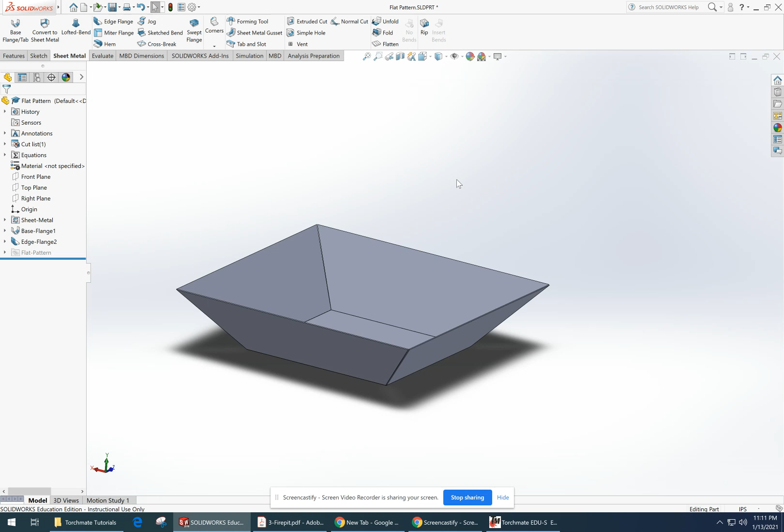So what we're going to do to start is build the firebox, and then we'll build the base after. If we take a look, I'll open my SolidWorks file here. This is essentially what we're building. This one doesn't have the drainage hole yet, but I built this one in SolidWorks with a sheet metal tool.

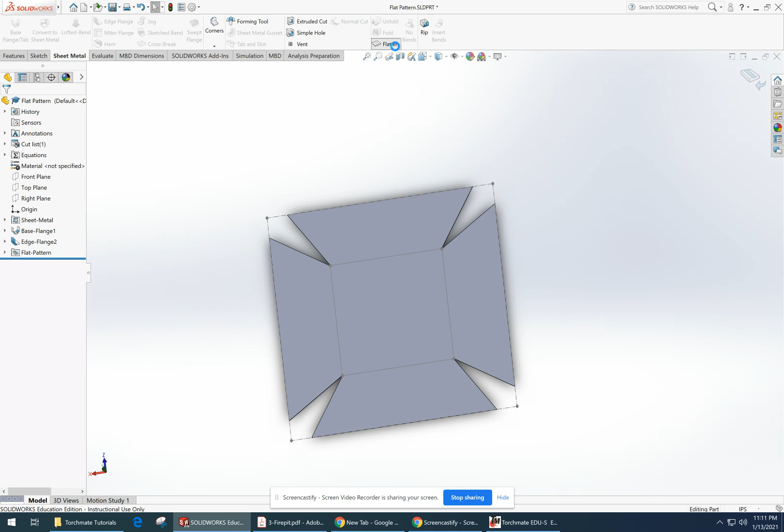So if I flatten it, it flattens out and gives us a pattern that if we cut this out on a Torchmate, all we have to do is fold along these lines to the correct angle and it folds right back up, and the corners will come together and it'll look like the box here, and we'll have a nice box to weld our feet on the base and make a cool looking little fire pit.

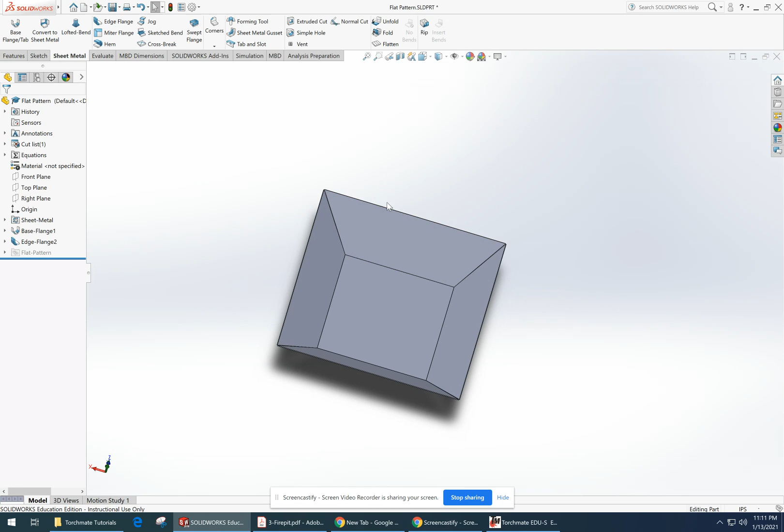We're going to design it so that it fits on a 48 by 48 inch piece of material, so a half sheet. Most of the time we buy the sheets in 4 foot by 8 foot lengths, so this will fit on half of one of those, 4 by 4.

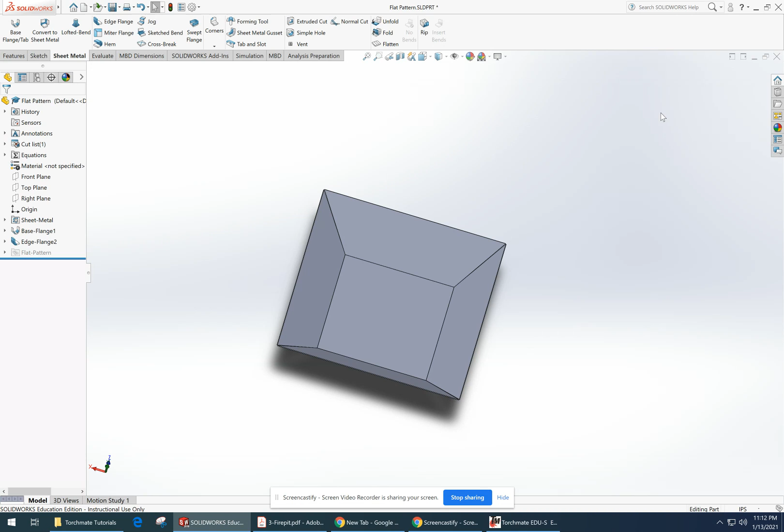So whatever it costs to purchase the material for a full sheet, we can get 2 fire pits out of that. So, alrighty, let's jump right into it and take a look.

We're going to keep this plan handy because I'm going to refer back to it for dimensions as we get going. One of the first things I want to look at, we're going to start with a square.

So let's start with our square. Go over here to our shapes tool, get a square, draw a random size square, doesn't matter. I got some graphics card issues going on there, that's the VMware getting a little laggy at times, but anyway, we're done with that.

We're good there. We can come in here and resize it to 18, and as long as we keep the proportional scaling locked, we should be good. Oh, we want to unlock it for this one, so that we can get both sides to 18. There we go, in case the rectangle we drew wasn't quite the correct size. So now we've got a square, 18 by 18.

Let's also place that guy. Well, actually, let's hold off because it's going to move it anyways when we start drawing some of these other shapes. Now, we do have a polygon tool in here, but to be honest, it's a little bit cumbersome.

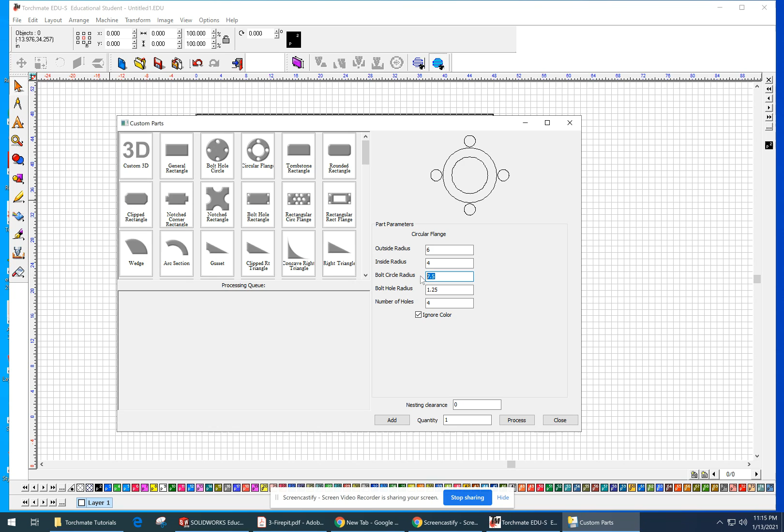Let's say we wanted the thing 2 inches thick, so the inside radius would be 4, right? And then the bolt circle radius, that's the radius for the center of the holes. So if we set that to 5, that would put those directly in the center, if this is 4 and that's 6, then the center would be 5, the diameter of the center.

And then if we come over here to the diameter, or bolt hole radius, I prefer they give you a diameter here, but they didn't, they gave us radius. So let's say we wanted a 1/2 inch diameter hole, we'd have to type in 0.25, which could be a little confusing. Or if we wanted, say, a 3/4 inch hole, we could do .375, which is half of 0.75.

And then all we have to do, once we like the way the preview looks, is click add, and it puts it down here into our queue. And then when we're ready to create that part, we just hit process.

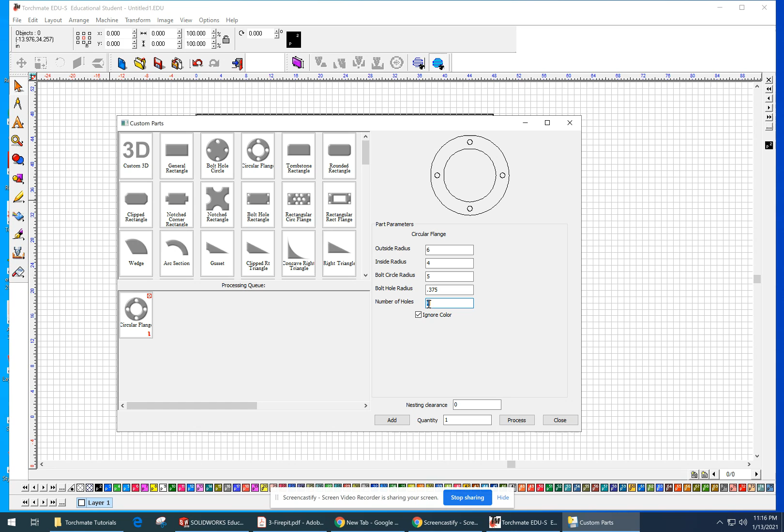Now, let's change this from 4 holes. Let's make one that has 8 holes. And you see it automatically puts them in an array pattern like so. And let's add that one.

And you can see we can modify and create some different ones over here and create them all at the same time. Okay, so if I hit process, it's gonna, that's why I said we wanted to wait on moving the square, but there they are. That's pretty trick, right? It's a pretty sweet little setup that we can use, and there's all kinds of really useful shapes in there.

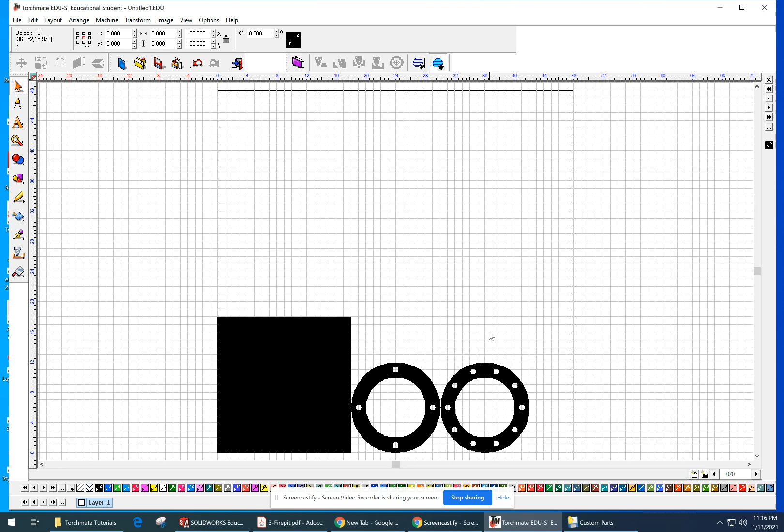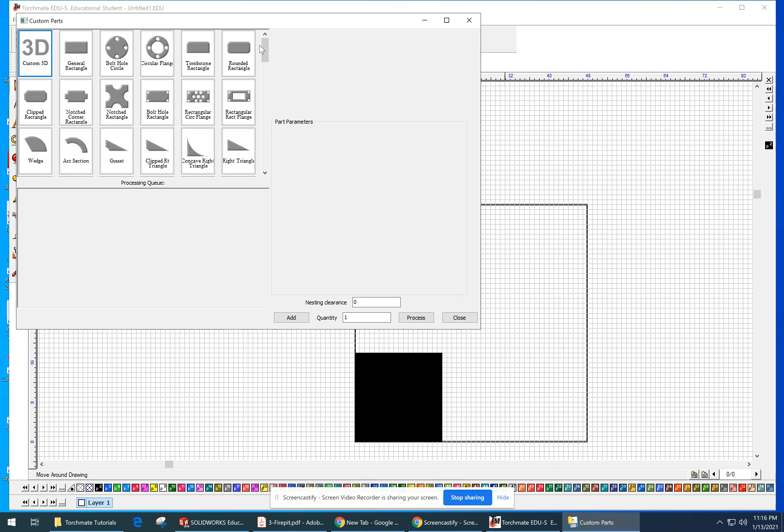Sometimes I'll show you one, this is a good one, I like to use this one. I'll point out a couple of them to you. So under layout and custom parts, we've got a few that I use a bunch. The gusset comes in really handy, it has a little notch in it so you can put it over a welded area. The bolt hole circle to weld a bracket, to make a bracket out of that.

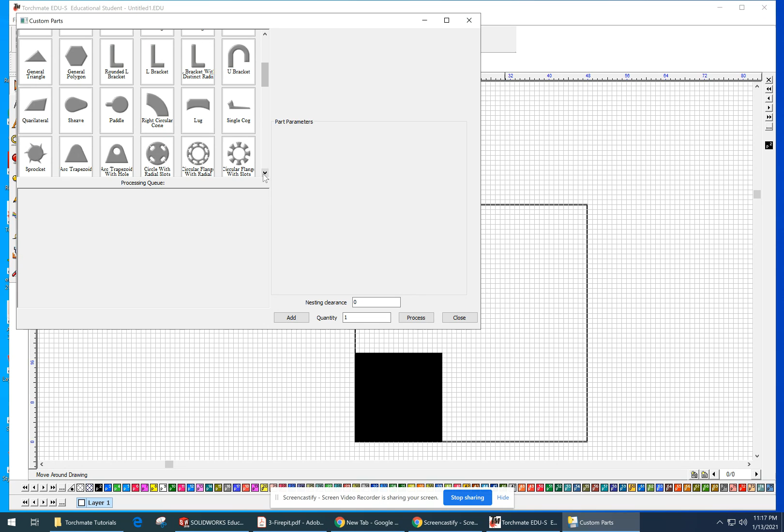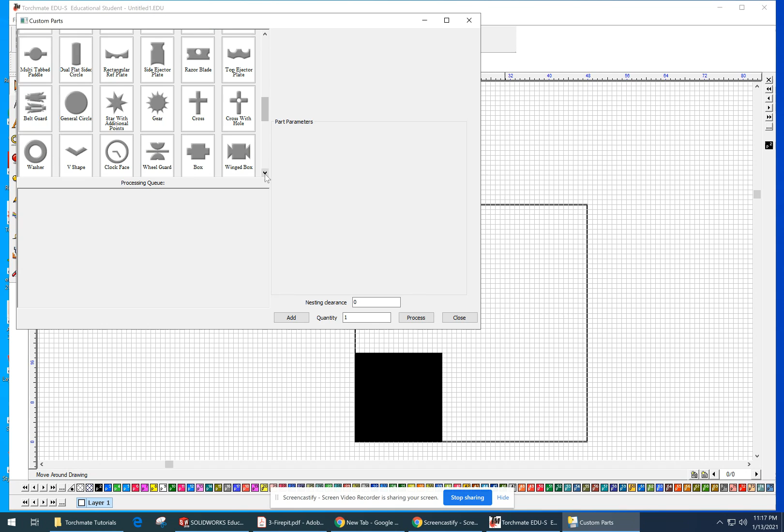So we have a bunch of different options here and things that we can use. But I think to create our firebox, we're going to do it with a couple different shapes. What we need to draw now are the trapezoids.

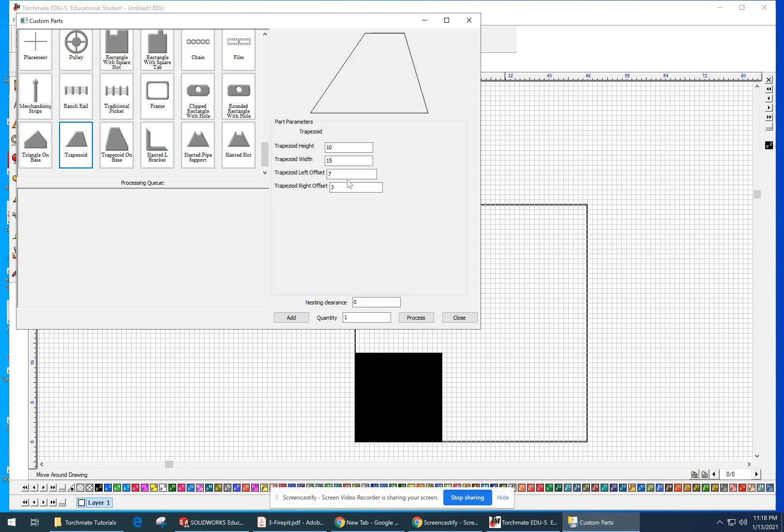So we're going to click this button, and you'll notice that it's asking us for some parameters. So that's where we need to keep this sheet handy, because this will give us the information that we need. So 30 inches will be the width, okay, and the height will be 9.

So we can go jump back into our Torchmate, and we lose the command when we bail out of it. So let's look back. So height's going to be 9, width's going to be 30. Now the inside part is 18, but it doesn't actually ask us for this dimension.

What it asks us is the offset. So how far I want to offset from this 30. And it's per side. It's offset left side, offset right side. That way you can make an asymmetrical trapezoid if you'd like.

So in this case, our offset would be 30 minus 18, right? So that gives us 12. But then that's per side, so we divide that in half and get 6. So the offset that we'll want for that is 6.

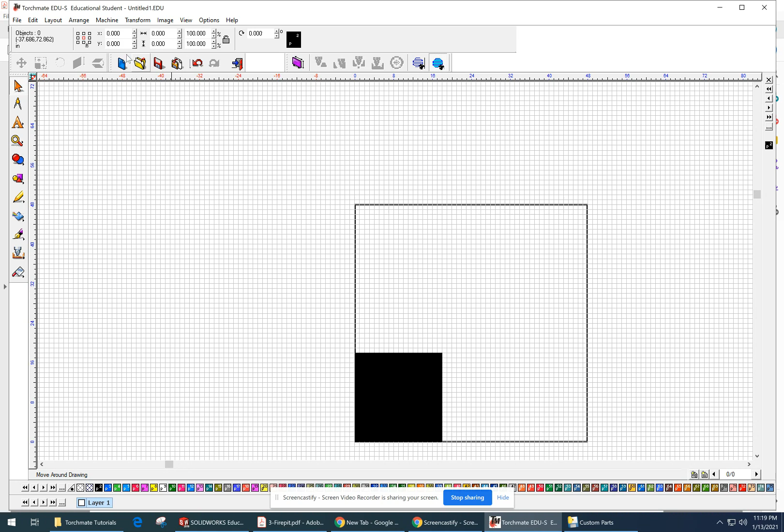So let's go back into the Torchmate and see if we can get that to work. So once again, layout, custom parts, and we're going to scroll to the bottom. It's on the very bottom, which is kind of nice. Just slide the mouse all the way down.

Okay, trapezoid height, we said we wanted 9. Trapezoid width, we wanted 30. And trapezoid left offset will be 6. And the right offset will also be 6.

I'll let you pause the video here if you want, or maybe watch me make this and then you can go try to make one and pause here if you want. But height 9, width 30, left offset 6, right offset 6. All right, let's add it to the queue.

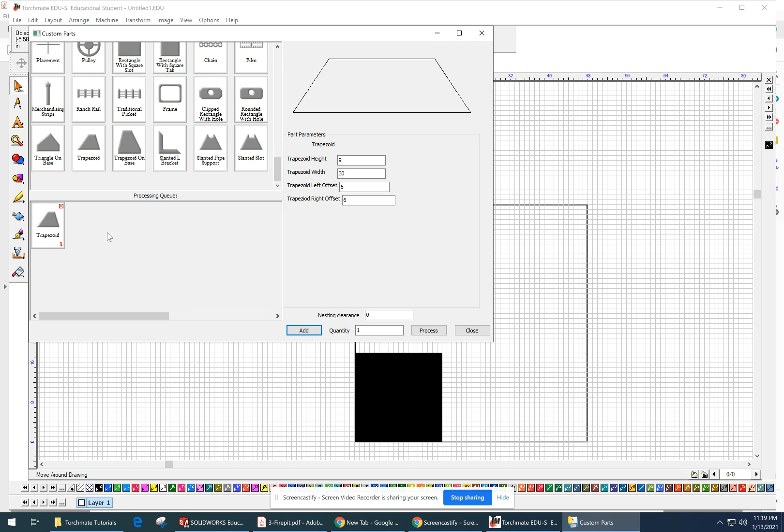Okay, now I could add another one and we could try to do them both at the same time, but because I need to go back and look at the plans, I'm just going to process this one.

And we're going to close it. Okay, now you'll notice it stuck it right up against this one, which isn't really what we want.

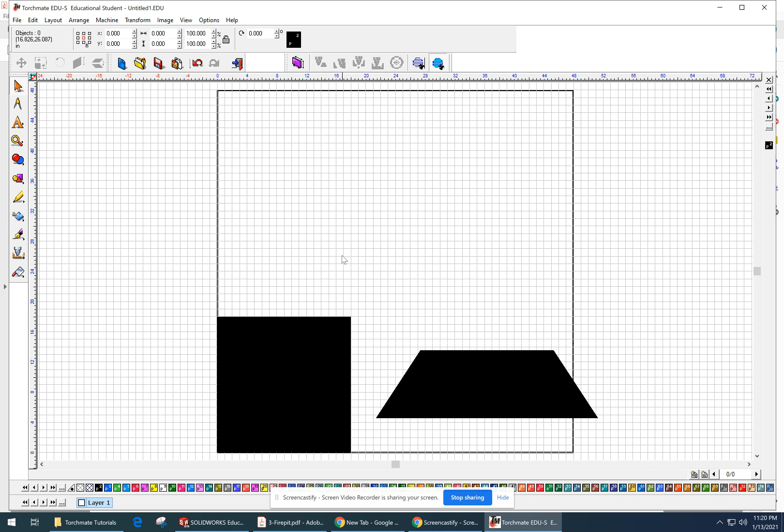So what I want to do is get these guys positioned in a spot where I can work with both of them. So the first step I want to do is turn off the show fill just to make it a little bit easier to see what I'm working with.

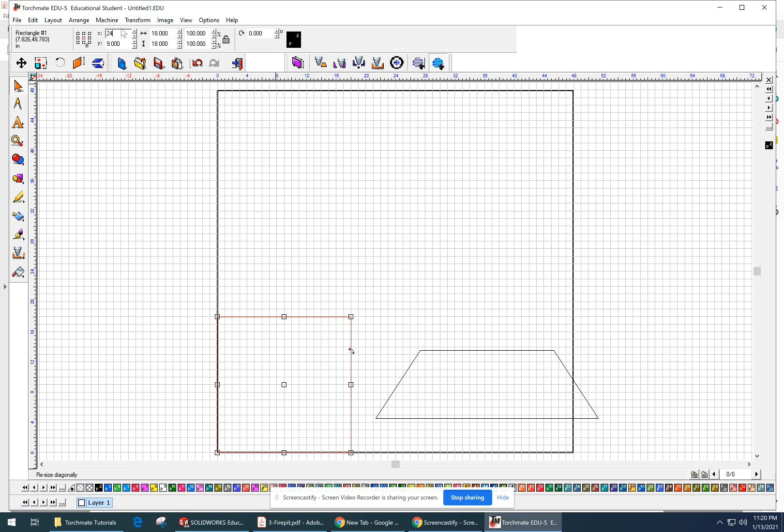So what I'm going to do here is grab the square by the middle nub, and I'm going to relocate it to the dead center of my 48 by 48 workspace. If your workspace is not 48 by 48, that's okay, it'll still work. Let's just set this to 24 and this one to 24.

Oh, why didn't that one go? That one didn't go, let's try this again. So let's go 24 on the X and 24 on the Y. Yeah, there we go. Maybe just click back up into the other dialog box there.

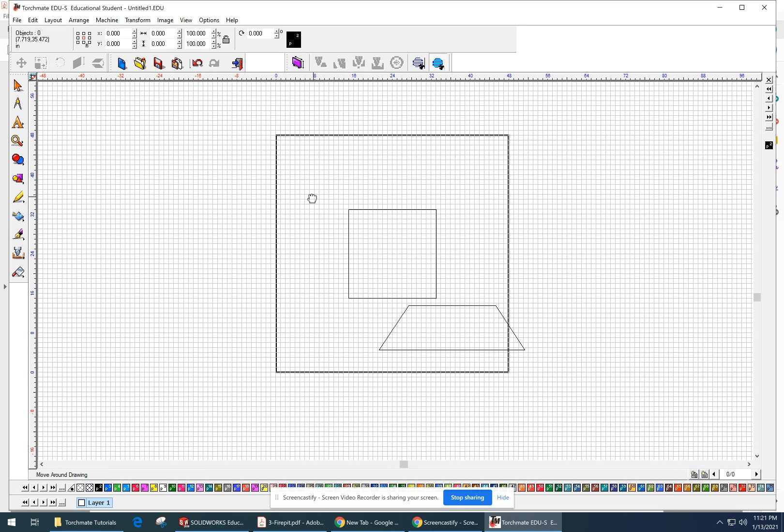Okay, so that then puts this thing in the center. Double check it here. If your material size is wrong and you want to adjust it, you do that under Layout.

There it is, let me get this. So it's a little glitchy here, a little laggy, but material size down at the bottom - you click that and you just change these to 48 by 48.

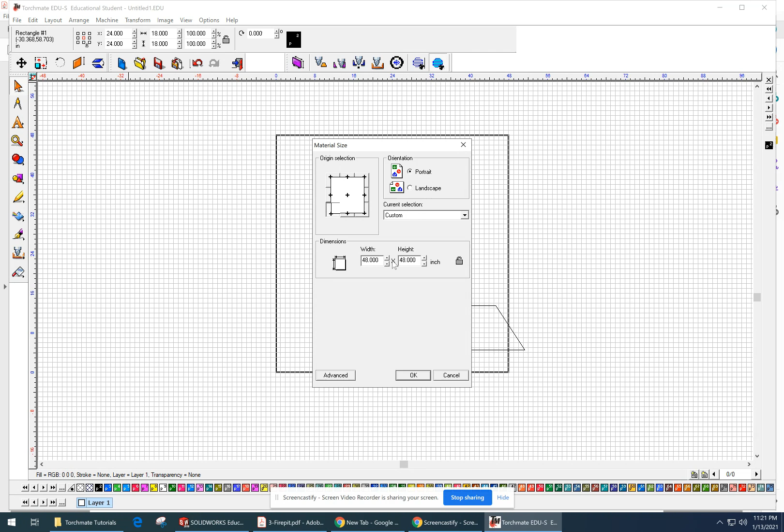Which, by the way, this is a really good spot that if you accidentally zoomed and you can't find your drawing anymore, no matter where you zoom and whatever you do, it's just not showing up. That's a good way to kind of just zoom to get it back - just go to Layout, Material Size.

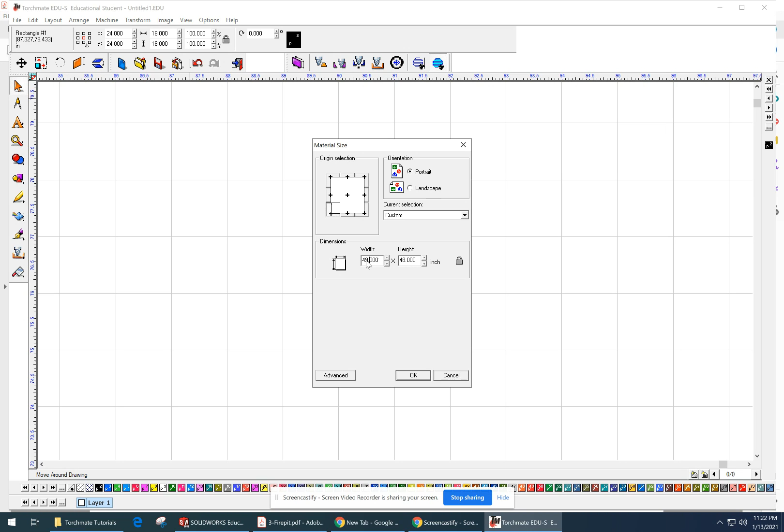Just change this by an inch, make it 49.0. And then when you click OK, it should zoom to show you the material size, so it brings us back. Then once you can see it, you can go back and just switch that guy back to 48 by 48.

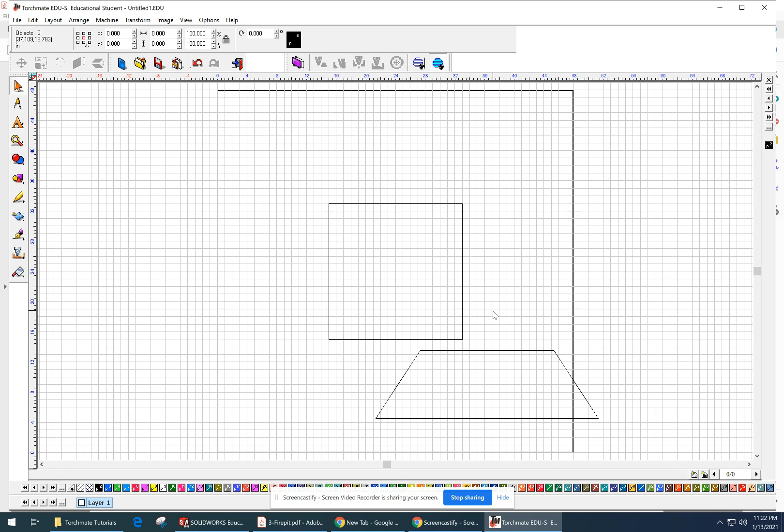Oops, wrong buttons, there we go. Okay, all right, so now what I'm going to do is grab this one, and I want to position it directly in line with our 18 so that we can weld those together.

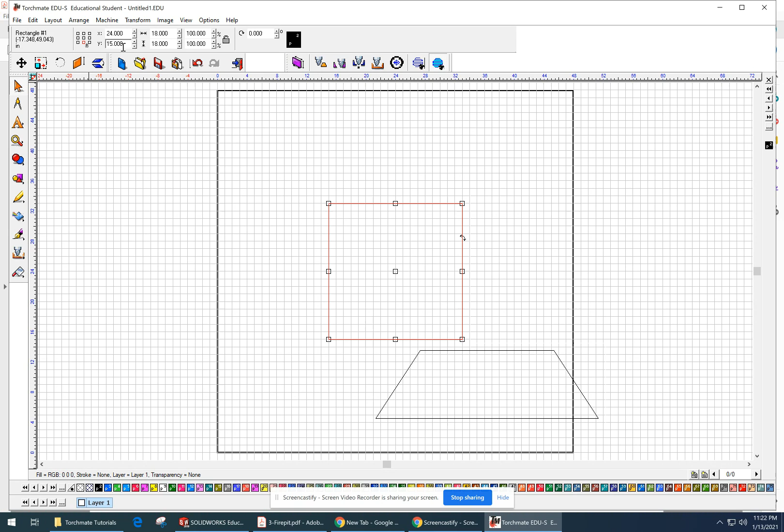So I think the easiest way to do that is to grab the top middle nub, this box right here, and line it up with the bottom middle nub of this one. So it's 24 on the X and 15 on the Y. So that's what I'm going to do here.

I'm going to grab it at the top, I'm going to make the Y 15, and we're going to go 24. All right, we got that one. Okay, so that one should line up.

Now I need to get the others, and I need to create one on each side. So there's a way to rotate these, but I can easily add the top one by highlighting this.

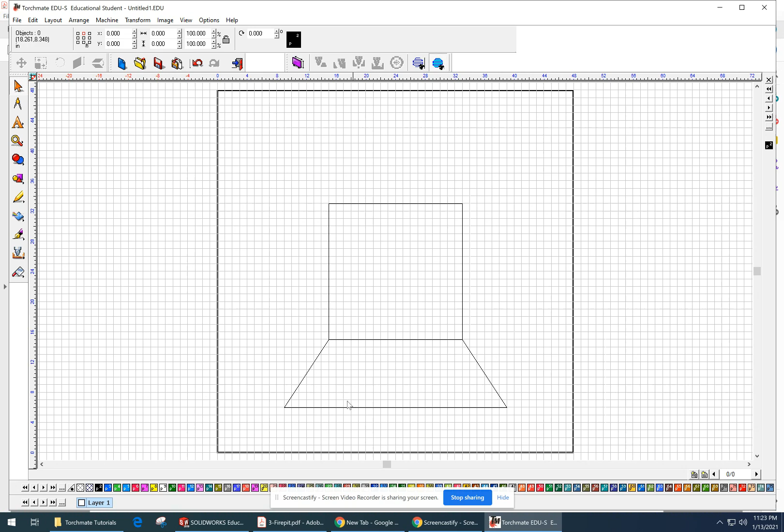And this little command right here is the vertical mirror. That's going to flip it over, mirror vertically. So if I click that button, it flips it like this, right? You can see how it spins that object.

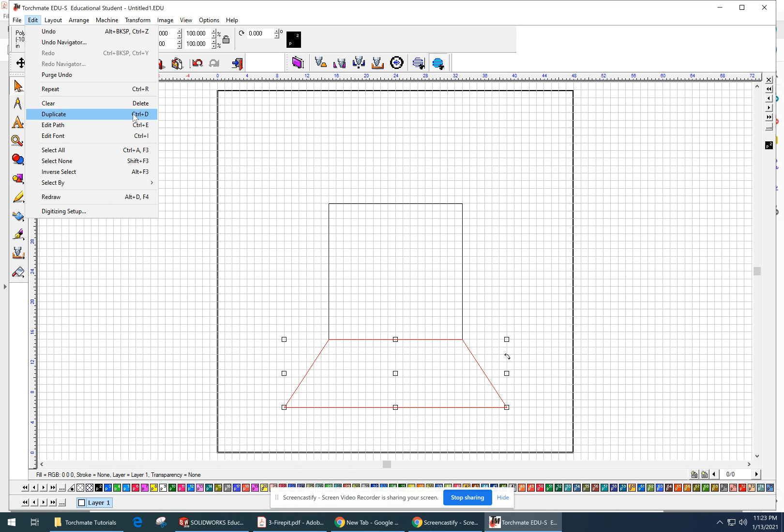So if I duplicate this one with Edit, Duplicate, or a Control D as a shortcut, okay, then from there, since it automatically highlights that one, I can just vertically flip that one.

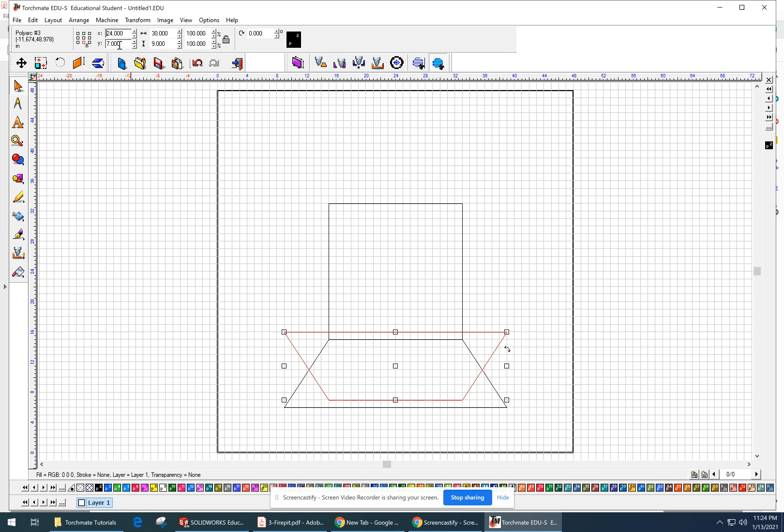And I'm going to grab this now at this node and the bottom node, and I know my X is going to be 24. I'm not sure, I could do the math to figure out the position of the top one - it's going to be up here somewhere, right? I can figure the math out and come up here, but it's easier to double check and make sure we got this pretty spot on.

If I go grab the square again and click back to the top nub, it gives me the value of the top nub, and the Y needs to be 33. I remember that the center was 24 - that's part of the reason we put it right in the center at 24.

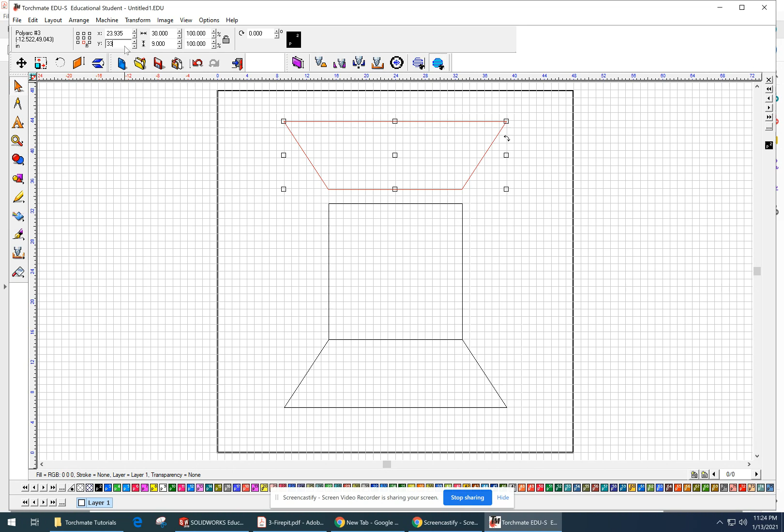Okay, so this one then, if I switch this back to the bottom nub and change that value to 33, that's going to line that one up.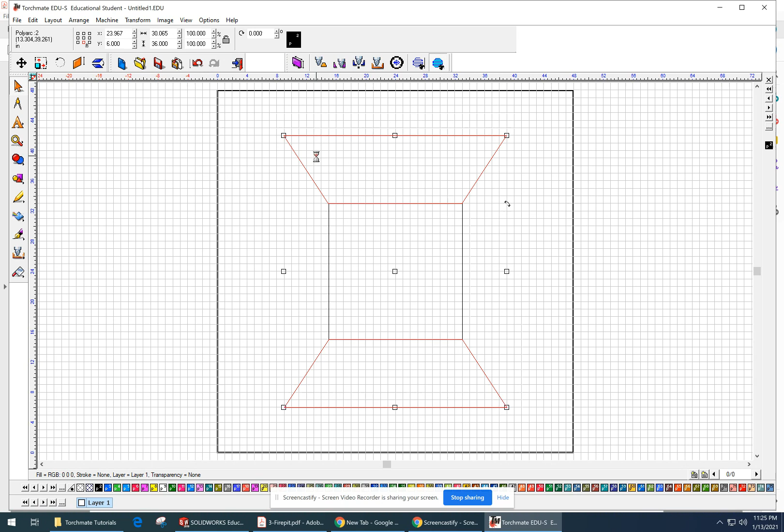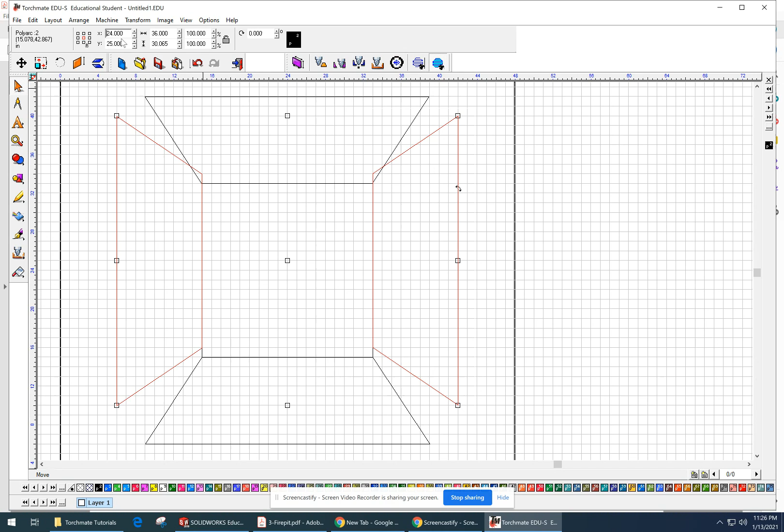Because they're both highlighted, I'm going to set the rotation angle and give this one 90 degrees. Now, because I have them both selected as opposed to one at a time, my center node, if it lines up with the center of this rectangle or square, should end up getting everything correct. Remember, if I click the center node here, this was 24, and the height was also 24. Sweet, that looks about like our pattern.

However, at this point they're not ready, it's not one piece yet. They're all still individual, and it's not going to cut these lines out if we try to make these a path—it'll try to create holes and things. Because they're just touching directly on the line, the weld tools aren't going to work that great either. So what we want to do is give it a little bit of material there to be able to weld to.

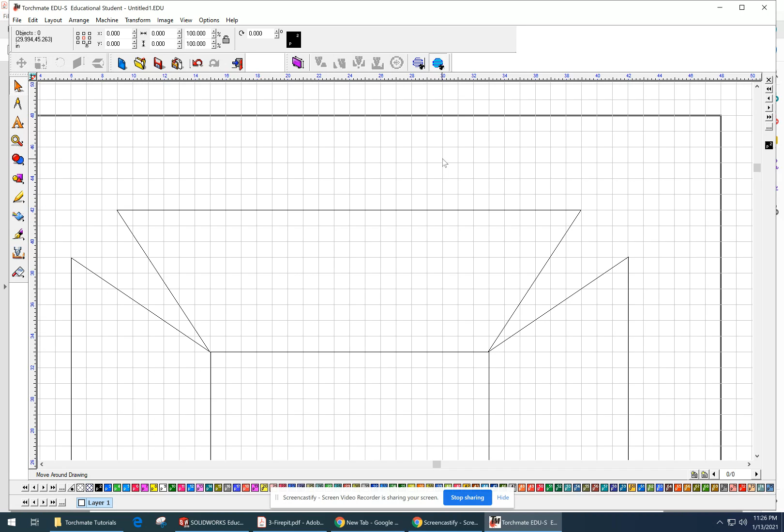Well, that one's not quite lined up. Not sure what's going on there. Let me click it and see what happens. Maybe I bumped it—oh yeah, that should be at 24.

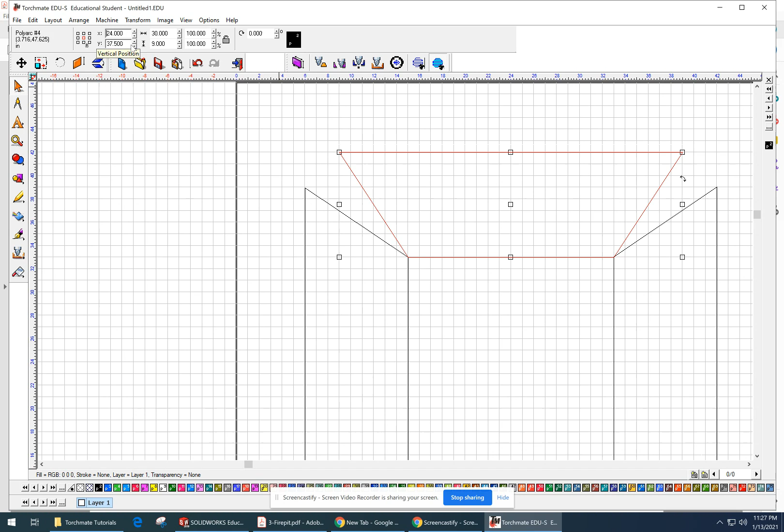Okay, that's better. I just noticed that when I was zooming in there. Let's check the others—yeah, they look good. The reason I was zooming in was to show you that if you try to weld these two together, sometimes it works, but generally you have mixed results.

So the best thing to do is grab this, use the arrow key, and bump it one direction so they overlap. I'm going to go down with this one. Now you can see that line got thicker—it barely moved, just a tiny bit. It was at 37.5, so it moved about 20 thousandths of an inch. That's not enough to worry about with a plasma cam.

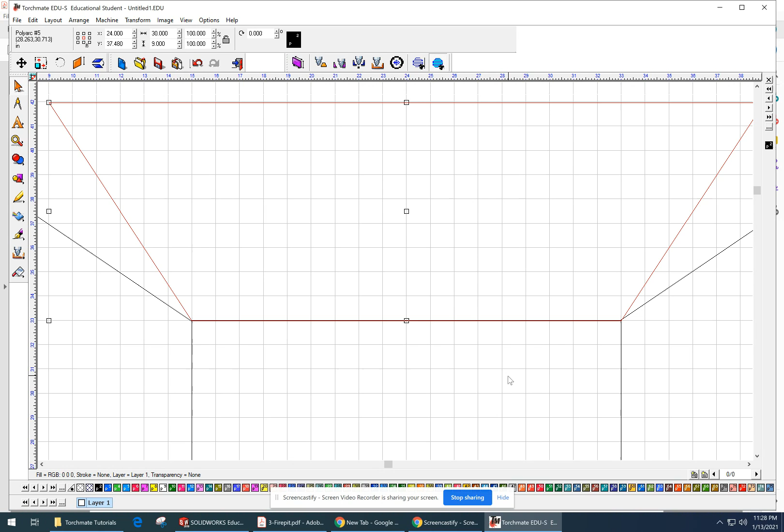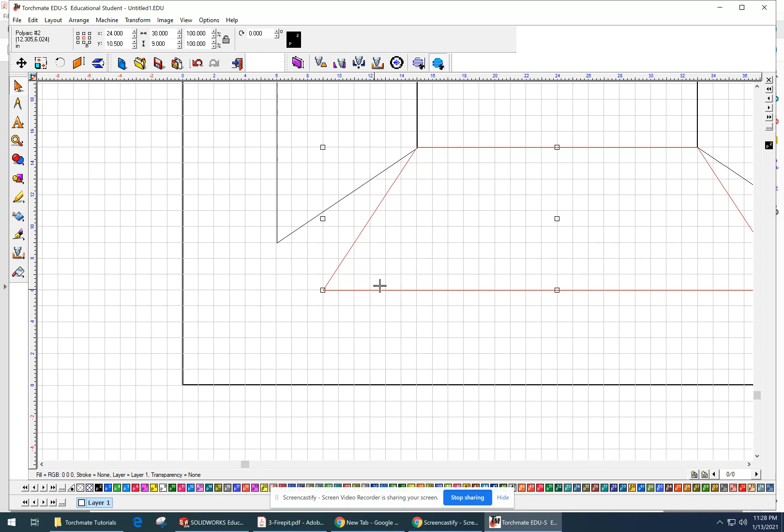20 thousandths is way off if we're machining a part in aluminum or steel, but for a plasma cut, 20 thousandths is more than close enough tolerance. So I got that one, now I'll click this one and use the arrow key left, bump it over just a little bit. Do the same thing over here for this one—arrow key right, a tiny bit—then zoom out and grab the bottom one and arrow key up.

Let me zoom in really tight on this one so you can see exactly what we're doing. See how they start to overlap there a little bit? Arrow key up—there we go.

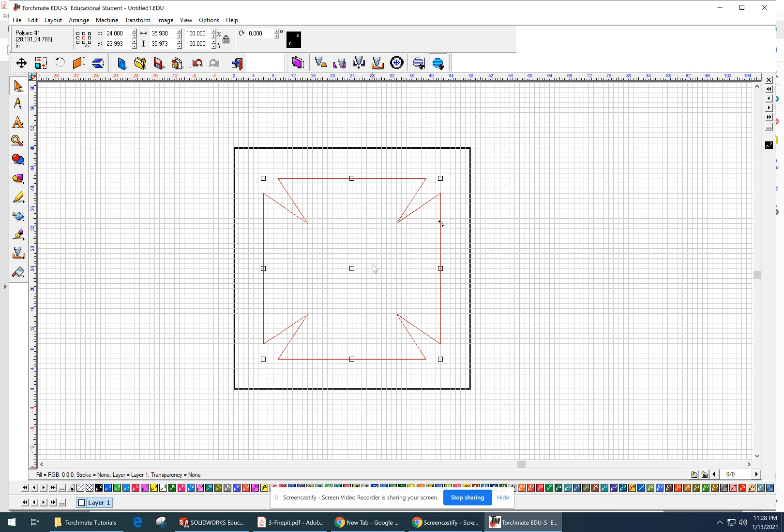So that way, now when I'm ready to weld this, I should be able to cover all of these and do a basic weld. I think it'll work, looks pretty good. Let's do the show fill, make sure we like it, and I'm happy with that. Looks pretty good—okay, so that guy's basically ready to cut out now.

This part is, so that will give us our fire pit. We'll have to put it in the press and bend it. We'll need a die that's the correct length to use our hydraulic bender, but we could also just bend them by hand, to be honest—they'll bend fairly easily.

So we need to make the feet now for the stand, for the base. If you need to, pause the video, come back anytime. But if we're here now, we're ready to move on to the next part, so let's take a look at the dimensions we're going to need for that.

Oh, we forgot the hole, let's do that real quick. So back in here, I'm going to use the shape tool and drag it out here in space. That's way too big, but that's okay. Click on it, make sure I lock my proportional scaling, and set one of the sizes—doesn't matter if you use the width or the height, if it's a circle it doesn't matter. But what does matter is I want it in the dead center.

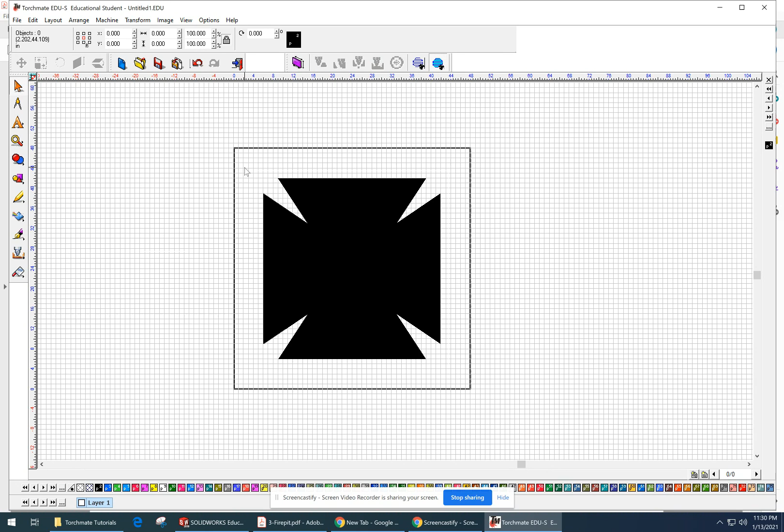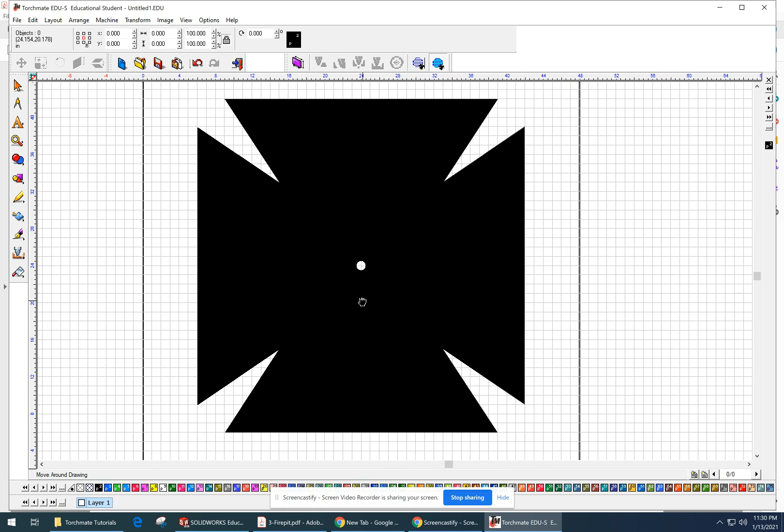So again, this thing's still at 24. Click up here and go to 24. Okay, and it's in the middle there. But if I click off of it, you'll see it disappears because we haven't made those a path yet. So we'll highlight both, arrange, make path, and there's the hole punched out of it—a drainage hole for water. If you leave this thing in your backyard without a hole, it'll fill up with water and become a mess, a place for mosquitoes to grow. So that's why I put the hole in there, so stuff can drain out.

For the feet, we're simply going to cut these out individually. We're not going to make it part of a bend pattern, just cut out this piece of sheet metal. We'll cut out 4 of them. As you can see, it's a trapezoid, and it has another trapezoid inside of it that we're going to cut out.

Let's start with the outline. It's 22, and this rounds to 14 and a half with another 10 thousandths, but we can just call this 14 and a half. The height over here is 4 - we'll cut that part out later. So 4 is the height, 22 is the width, and the top width is 18. I'm getting confused because there are 2 trapezoids we're going to draw. We're going to draw the first one, the outline, that's the 18 right there because that's the width of the box. Then the height will be 4, and 22 across.

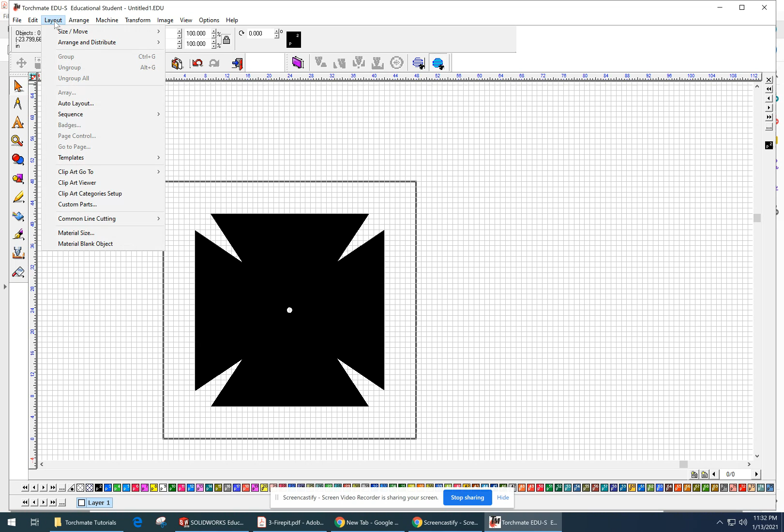Okay, so let's do that. 22 and 18 - what's our offset going to be? Well, 22 minus 18 is 4, so it's a 4-inch offset total, which means 2 inches on each side. So let's go into the Torchmate, and we'll go grab our custom parts tool again.

I'm just going to scroll all the way to the bottom, hit the trapezoid button, and this time the height is going to be 4, and the width is going to be 22, and the offset is going to be 2 on that side and 2 on that side, which would be a total offset of 4. We do need 4 of them, but I'd rather just edit 1 and then duplicate it - it's a lot faster than editing all 4. So I'm just going to add that one and process it.

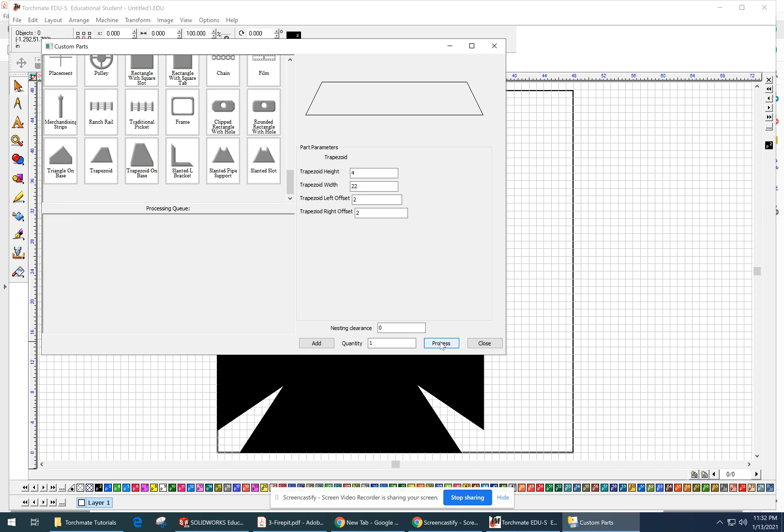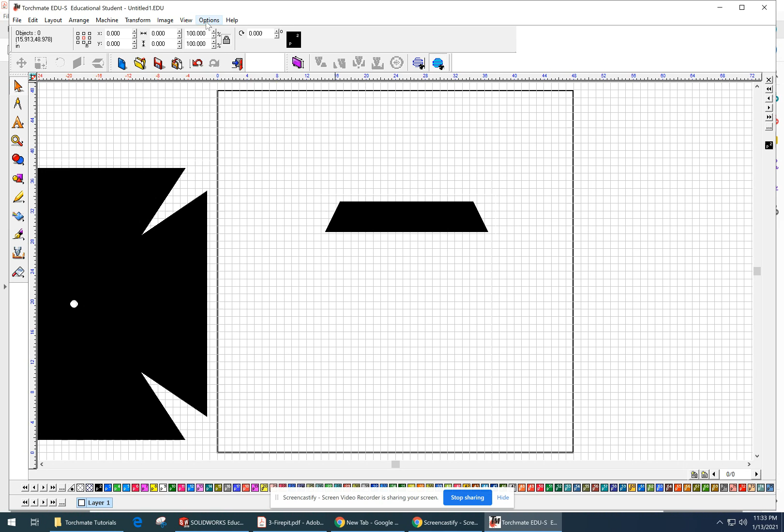And then close it. Notice that it stuck it to the cross here, our iron cross looking pattern. We're going to move that out of the way, and I'm going to work with just this for now. That looks pretty good. I'm going to turn the fill off just for a minute, because I think it's easier to work with the fill off.

Let's draw that inside one. So what we'll do is draw another smaller trapezoid, put it here, and do an and/or weld to eliminate the middle and cut it out. Let's look at the dimensions for that one - this will be 16 and 14 and a half with a height of 1.5. So 16 minus 14 and a half gives us 1.5 inches, so it'll be a 3/4 inch offset on each side.

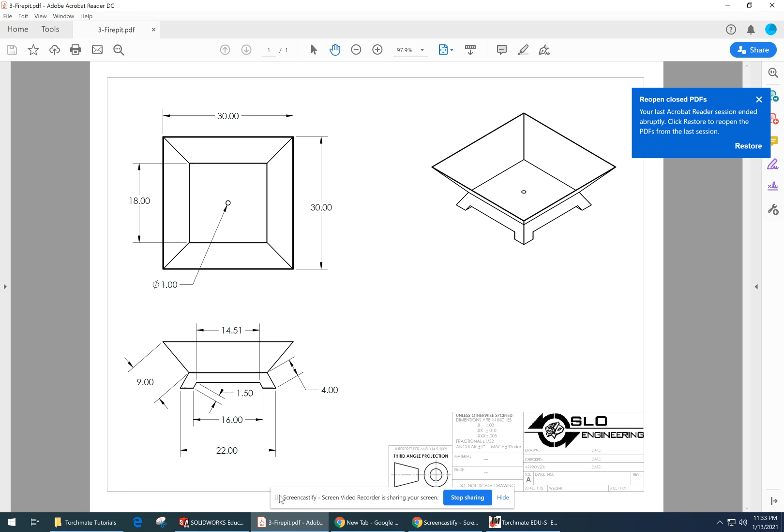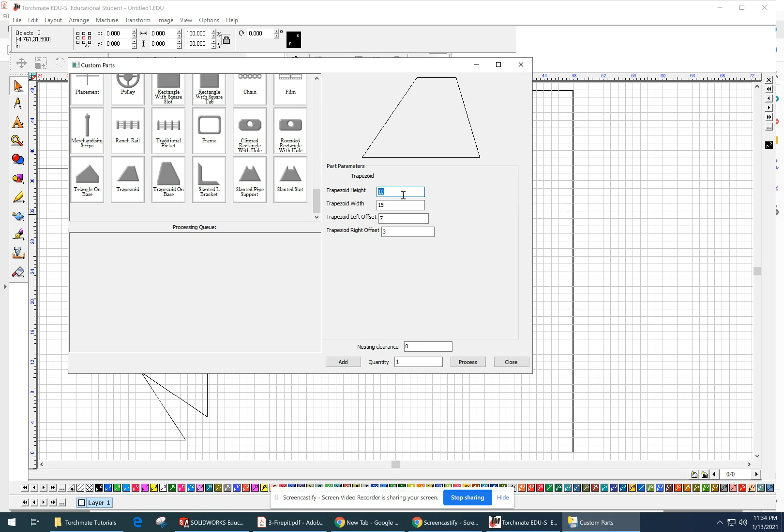So we go back over here, arrange - and I apologize if I didn't pause on that last one long enough to get you the dimensions, but I'll pause a little longer on this one. My graphics are freaking out again. Okay, so the height for this one was 1.5, the width was 16, and the offset was 0.75 on each side.

So again, the offset is how far - if you had a 0 offset, it would go straight up. If I did the right side offset to 0, that would be straight. If I did 1 inch, it would go that way. So I want it to go in 3/4 of an inch, because the 3/4 on the right and the 3/4 on the left makes the difference of the 1 1/2, which is the total width is 16 and the total height is 1 1/2.

If this was my software, I might have set it up a little differently - I might have asked for the 2 values, but it's not mine, and I didn't set it up. But it works good, it actually works really well. So some of the features in there, you just have to look at what it's asking for and give it the information it wants.

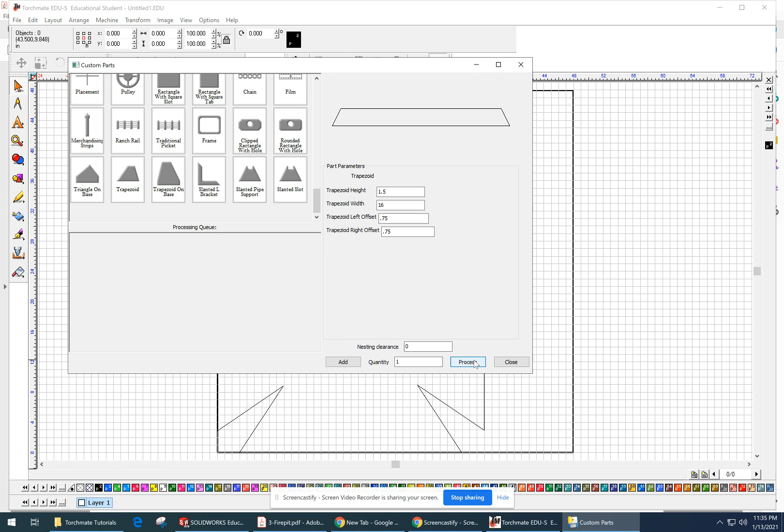Okay, let's add that and process it, and let's close it. It moved everything around again. So again, we'll move this guy out of our way, off the material for now. Oh, I have to apply - there we go. We'll get that applied, and then we're going to grab this one.

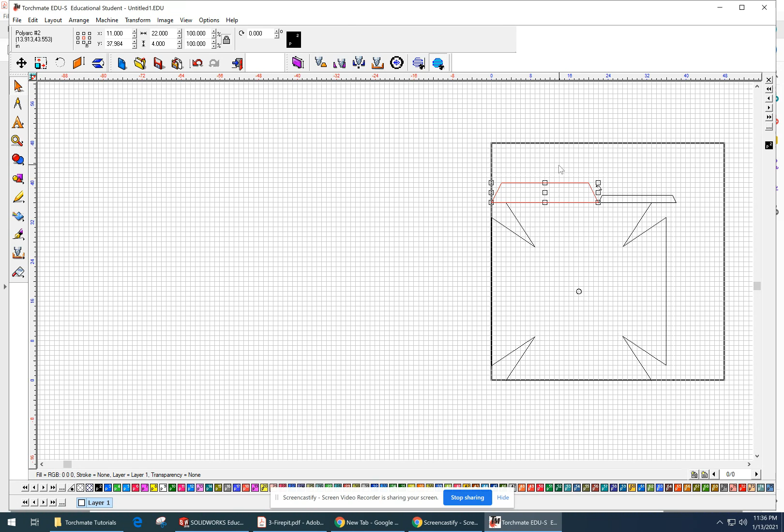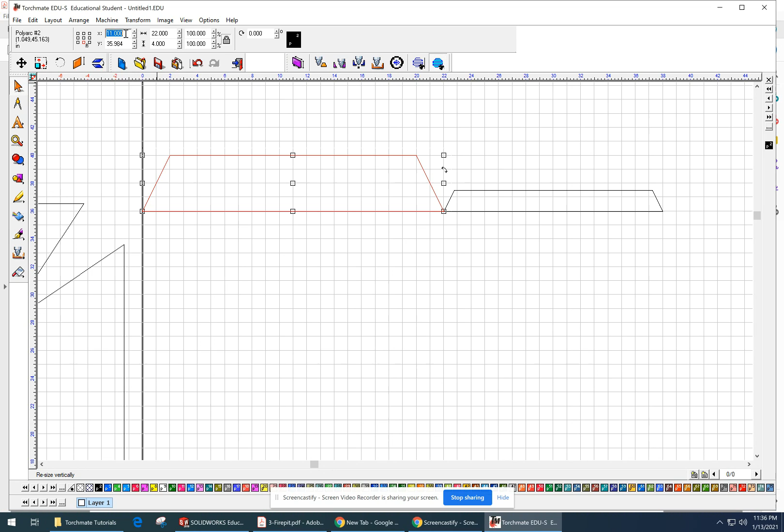I'm having a screen glitch issue here, something's going on. There we go, okay. So let's just put this one, the larger one, in a position where we can edit it. Let's grab it by the bottom center node, because that's going to be the 2 common nodes for both of these. And let's just put it at a nice, easy dimension - let's put it at like a 10 and 10.

Okay, it kind of zoomed out of view. It's wider, so it's hanging off the material side, but that's okay. If that bothers you, we can change it. We could put it at 12. Let's put it at 2020. There we go. 2020, what a great year that was.

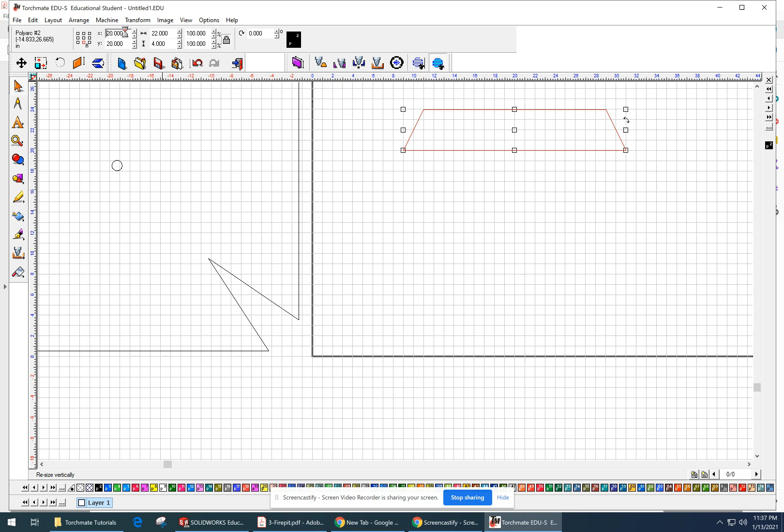Okay, now let's take this one. So this guy, let's double check it. The bottom center node is at 2020. We're going to do the same with this one. Bottom center node, 20 and 20.

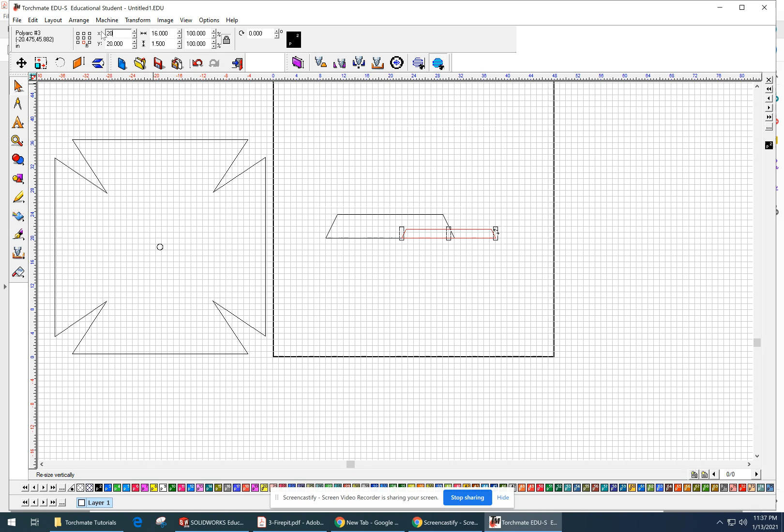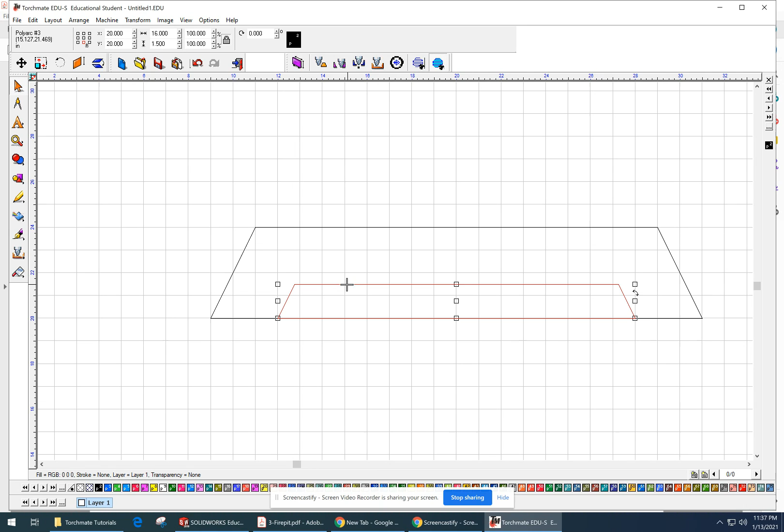And there it is. Okay, now same thing with the weld on this. It might have an issue because that line is really what's referred to in CAD drawings as zero thickness geometry. You can't have two things exist in the same space without issue, and then when you try to make them into a solid, it doesn't really work if there's zero thickness geometry. So what we want to do is eliminate that by, this time, we bump this one down just one, right?

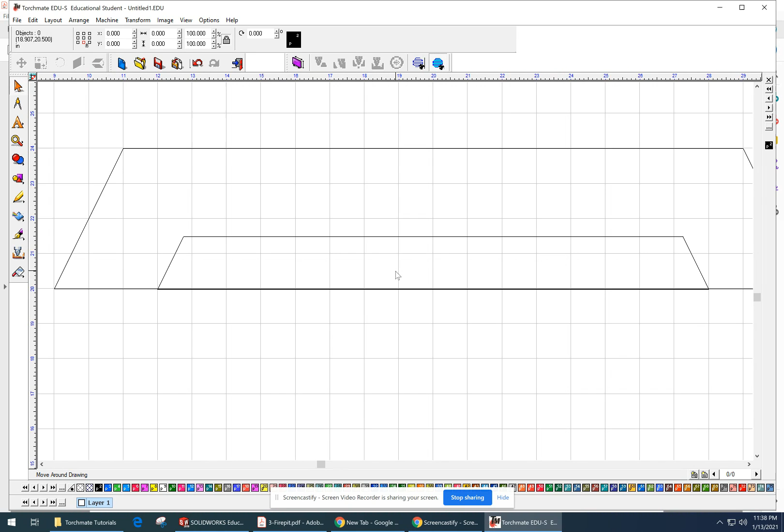So if we zoom in really tight, you'll see that it's actually over the line a little bit. Again, it's graphics, I apologize. If I was doing this at school, it wouldn't have this laggy glitchiness, but because we're on this VM, it can get a little glitchy and laggy, but it is what it is.

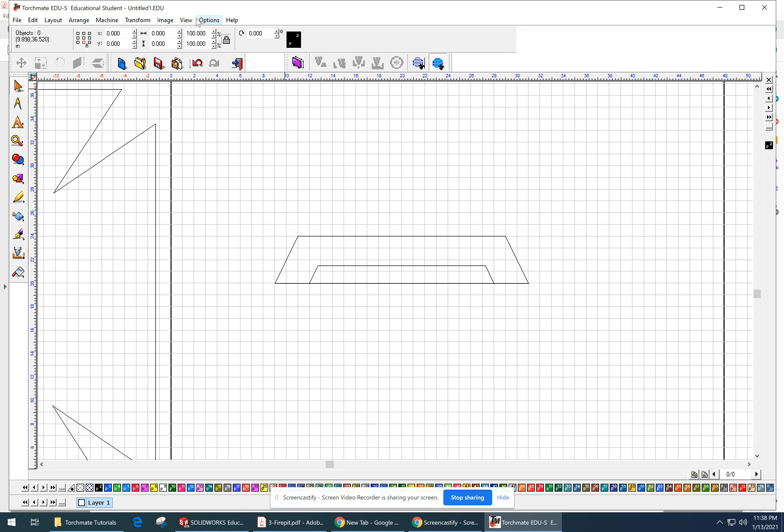All right, so now for these ones, we want to use the XOR weld, because if we click that, that's going to join these and allow me to get rid of that part. So if we look at it with the fill on right now, you'll see that there is actually two pieces. There's this piece, and then there's this little bit where we overlapped a tiny bit there. So I'm going to delete that one.

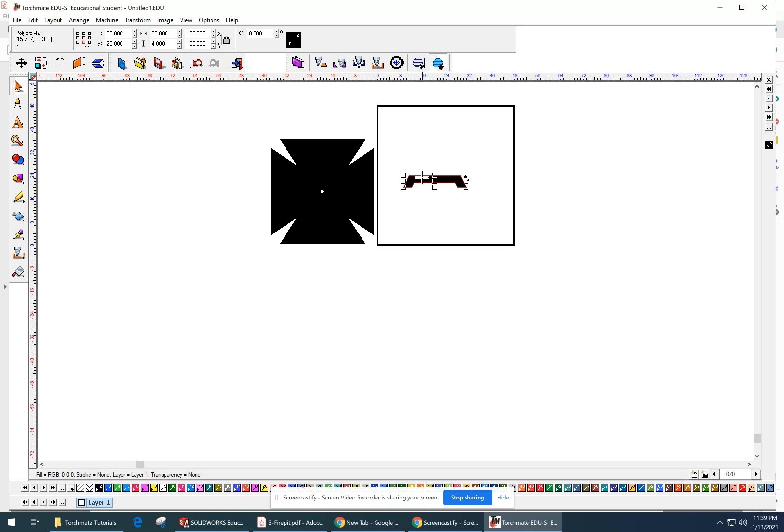Okay, and now that guy's ready to cut out. This guy will be ready to cut out, so we can just slide these into our material space. We're going to need four of these.

If we duplicate it, Control D, and I'm going to move it over here. Now this would be totally fine because we've designed it to be cut out on this 48-inch piece, but why not save as much material as we can and nest these together, put them a little closer.

So if I mirror it, now it allows me to slide this guy over, and if I just use the arrow keys, I can hold the arrow key down and keep going until, well, we don't want to get so close like this that we run the risk of melting one when we're cutting the other. So I like to give a little bit of material between them, maybe half an inch, or at least a quarter of an inch, something like that.

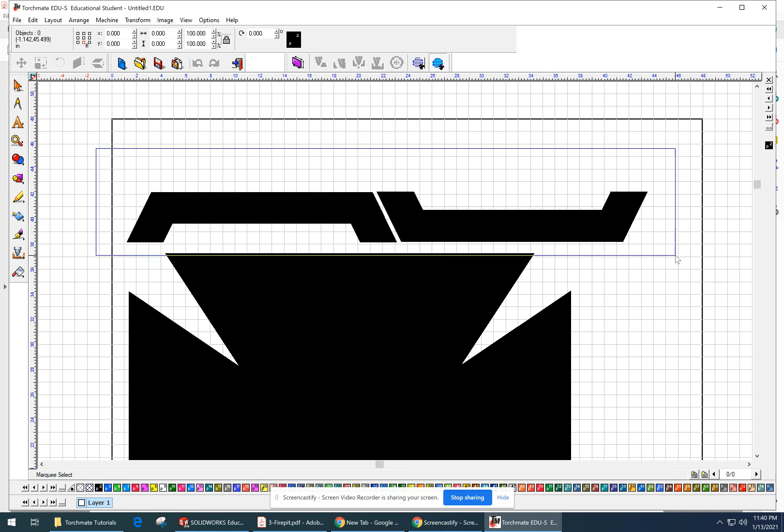Same thing goes if we wanted to be really cautious, we can move both of them down. But I think I probably would actually move both of these down just a touch. That's a lot of space here to get eaten up by scrap metal. So let's bring these down a little bit, get them nice and close.

And then with them both highlighted, if I do a Control D again, then it just flip-flops, or it creates another set of those, and we'll pop those guys there. And this is ready to cut out.

So we'll come over here. I probably should have saved this way before now. I waited, I was flirting with disaster there. But again, P drive, most important part of saving this is that you get it in the P drive.

And into our Metal 2 folder. So here's our Metal 2 folder, and we're going to title this one. What are we going to title this one? I've got to get the Google Doc pulled up. You guys will have this available for you on Google Classroom.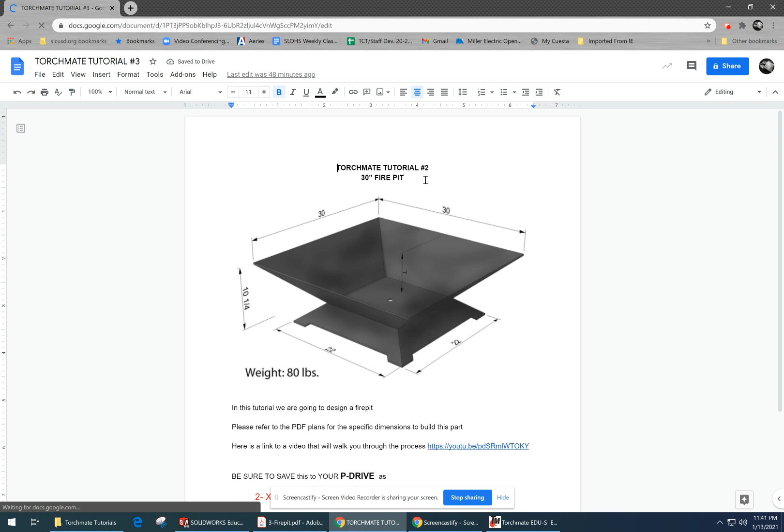And here it is, Torchmate tutorial. So if we scroll down, it says right here, XX, you replace the X's with your initials, and we're going to call it Fire Pit. So this will be, mine will be TF Fire Pit, right? So, and this one should be 3, which is wrong in yours, because this is the third one you guys are doing. So we'll go 3, and I'll go TF, and then Fire Pit. I'll take the caps lock key off.

I'll put a space in there, make it a little easier to see. Okay, so it'll be 3 TF Fire Pit, and hit save.